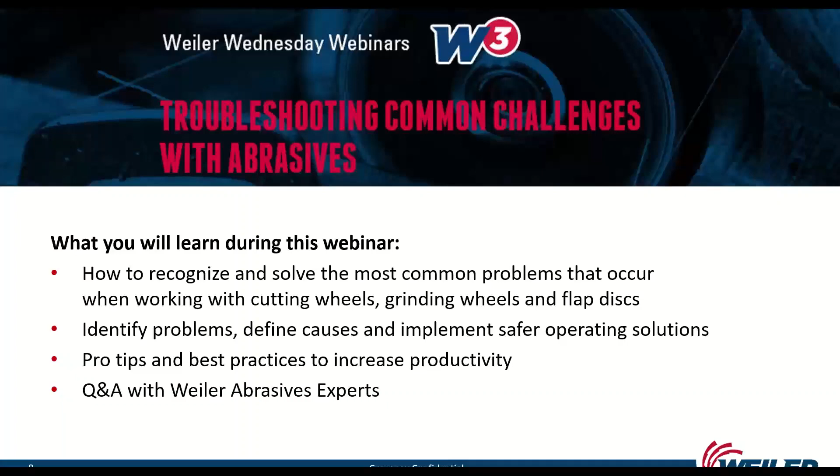My name is John Hines, District Sales Manager in the Mid-Atlantic region, and today I'll be troubleshooting common challenges with cutting wheels, grinding wheels, and flap discs. The information has been compiled from real experiences of district sales managers like myself, what we've seen in the field working with distributors, operators, safety directors, and owners. The problems identified are not exclusive to novice operators, but for all levels of experience. Consider this as an additional Weiler resource to help your company increase awareness of common problems when utilizing cutting wheel, grinding wheel, and flap disc. I'll also be sharing pro tips and best practices to increase productivity and cost savings.

Next slide. All right, so just like at A&M, at Weiler, we think about the business, we focus on the customer, and we help get it done safely. Weiler products are designed and manufactured to the strictest standards to ensure the highest level of quality and safety. Always be aware and follow proper safety practices.

Think about safety before you start your job and after you complete your work. Take the time to check your PPE for damage. Always inspect your tool and abrasive wheel disc for any signs of damage prior to use.

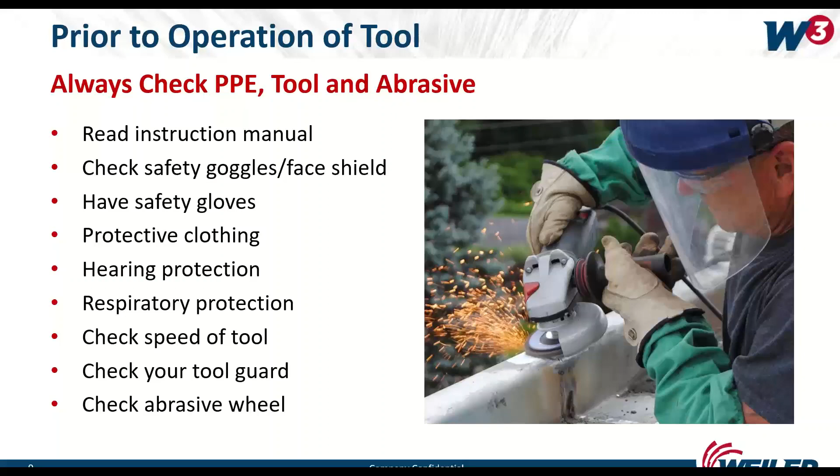And always keep in mind, A&M was able to supply a catalog of all the PPE and tools and abrasives that you need. Correct, Mark? That's correct, absolutely. So just talk to your local rep if you need a replacement or need anything new. Always important. All right, next slide.

Okay, best practice recommendation for cutting wheels. Utilizing a rocking motion through the cut versus a hard pushing force is a valuable best practice to implement when using cutting wheels. This will greatly improve productivity, giving you a better balance of aggression and life of your wheel.

So when I first used a cutting wheel on a handheld grinder, I was not aware of this technique. I started by pushing forward into the metal, just like I would with a circular saw cutting through wood. I had a heck of a time controlling that grinder, and I wore that wheel out so fast I barely made any cuts. Thankfully, after the suggestion was made to me - hey, relax your arms, don't tense up - and use your whole body to create a rocking motion moving through the cut.

You're not working with just your arms. My experience was far more positive. These simple changes improved my control of the tool, allowed me to make more cuts, and showed how efficient the wheel could be. Next slide.

So let's talk about some problems that occur involving cutting wheels. Excessive pressure or leaning on the grinder will generate tremendous friction and heat at the leading edge of the cutting wheel. This increased heat and friction will cause the wheel to break down faster. Some users feel leaning on the grinder will increase the cut rate or performance, however, that is not the case.

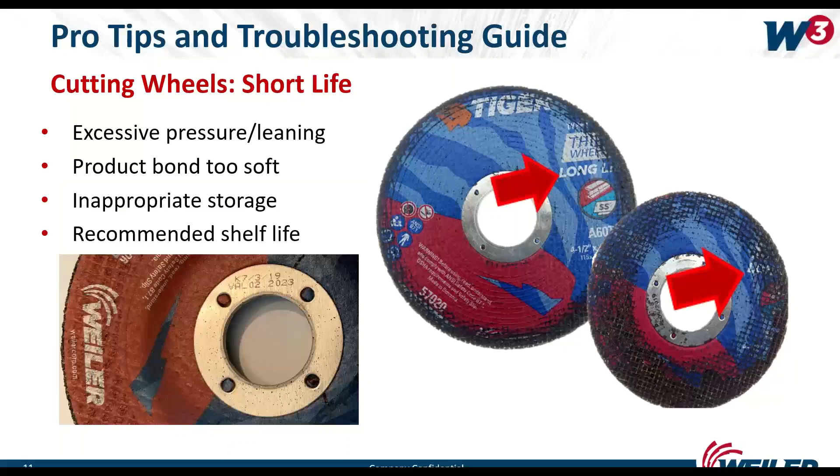Varying your orientation away from 90 degrees can create excessive side load stress on the metal flange. This stress can cause the wheel to break free and lead to injury. An important product note to be aware of: all Weiler cutting wheels do have metal flanges in the arbor hole. If a workpiece is not properly secured, it can create excessive vibration. This stress can cause fractures throughout the wheel, causing the flange to break free.

If your cutting wheel becomes pinched or bound between two pieces of metal, the grinder will continue spinning and it will rip the flange free from the rest of the wheel. I have personally seen this happen while testing other cutting wheels at a fab shop in Maryland. Fortunately, the guard was positioned properly between the wheel and the operator, so when it broke free of the flange, the wheel did not strike the operator, and no one was injured.

When using a 7/8 open arbor cutting wheel, make sure the front and back flanges properly fit your grinder to correctly mount your wheel. The back flange should rest on the grinder spindle and not move excessively. The top flange should securely hold your cutting wheel in place and not allow the wheel to spin freely. There should not be any free movement of the wheel once it is securely clamped in place.

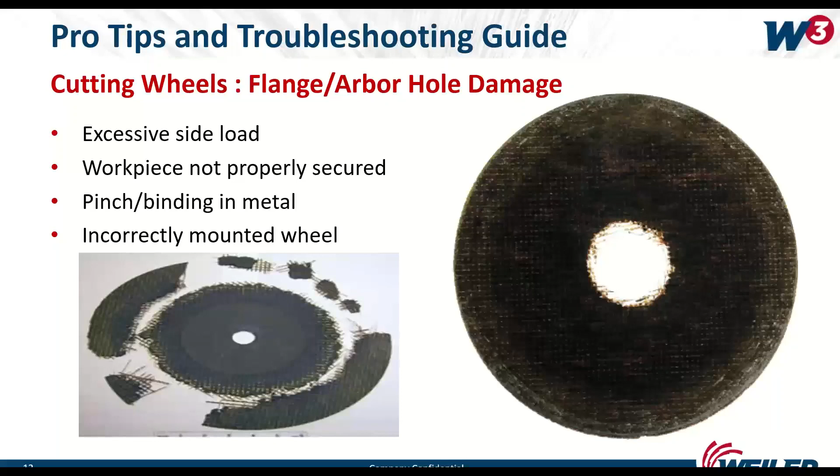A pro tip: after mounting the wheel, gently jog the tool by first holding the grinder away from your body and while not touching the workpiece, turn the power on to ensure that the wheel is properly secured. If you notice the wheel is spinning out of balance, check the wheel and check the tool spindle and make the appropriate changes.

Damaged edge: if you're not applying sufficient pressure, the wheel will not bite into the material, which will create excessive vibration or chatter. The vibrations can lead to frayed edges, as you can see in the picture to the right here.

As mentioned previously, these cutting wheels are designed to be used at an orientation of 90 degrees to the workpiece. It is important to remember they are not reinforced for stresses on the side of the wheel. If you are using a cutting wheel for grinding or deburring, you risk injury due to breakage by placing excessive side load stress and weakening the structure of the wheel. If you do need to cut and grind, I recommend looking at one of Weiler's 7/8 open arbor or metal hubbed combo wheels, which are designed for deburring and light grinding as well as cutting.

If a cutting wheel binds or stops during a cut, remove it before starting and re-entering a cut. Never try to restart a cutting wheel while it's inside the cut line or in contact with the workpiece. This is extremely dangerous.

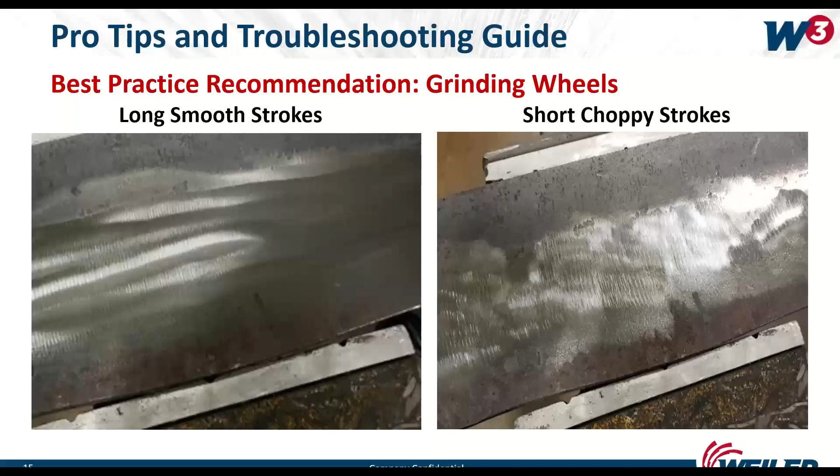Let's talk about problems that occur involving grinding wheels. A bent grinder spindle or damaged bearings in your tool can cause the wheel to spin out of balance, leading to uneven wear and possibly fractures in the wheel. A grinding wheel that has damage at the arbor will not mount properly on a grinder's flange and spindle. This damage can cause the wheel to spin out of balance. As you can see here in the pictures, the significant fractures in this wheel, and to the left you can see significant wear. So you're able to see very quickly when it's running out of balance.

Also, be sure the back flanges fit properly on the grinder spindle. Loose fitting back flanges will not allow you to properly tighten the wheel to the grinder for optimal safe use. Wheels with a 7/8 open arbor require both front and back flanges to be securely mounted on a grinder. Wheels with a 5/8 11 metal arbor do not require these flanges to be on the grinder. At Weiler, we make grinding wheels with both a 5/8 11 metal quick change arbor as well as a 7/8 open arbor. The metal quick change arbors allow for faster changeover times and can eliminate possible cross-threading experienced with non-metal threaded arbor products.

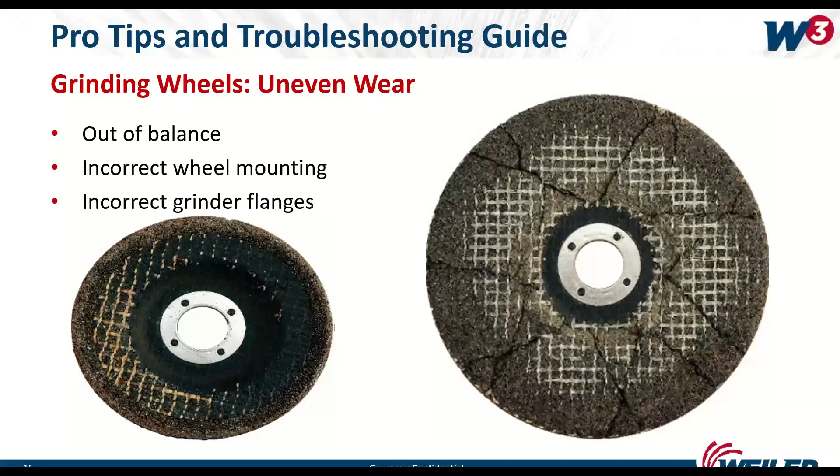Uneven edge wear: if you're pushing hard or using too much pressure, it is detrimental to the performance of both the tool and the grinding wheel. It will not make an abrasive work harder or faster. Rather, it will generate heat on the workpiece and dull the abrasive grains instead of exposing new sharp edges. If you feel the grinder getting too hot or hear the motor slowing down, you are leaning on the tool more than you should.

Now, grinding angle. A lower, flatter grinding angle will increase your wheel life, but at the expense of effective stock removal. If you are grinding on harder metals, the shallow angle will not be efficient to bite into the material. It will skate over the surface and your removal rate will significantly reduce, greatly decreasing your productivity.

If you need an aggressive grinding wheel for use at lower angles, you should consider the Type 28 wheel from Weiler, also known as a saucer disc or saucer grinding wheel. A steeper grinding angle, closer to 45 degrees, will allow for a more aggressive removal rate. However, keep in mind it will increase the chances of gouging material by digging in too deep as you are grinding.

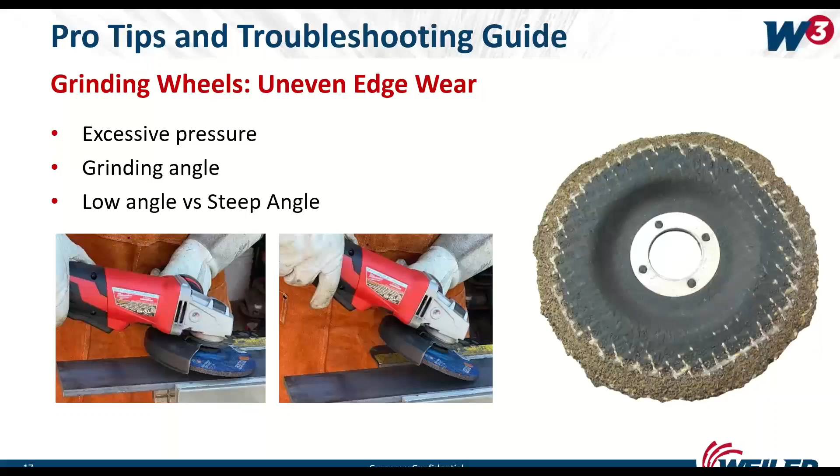Inappropriate wheel choice - this is something I see often in the field. End users trying to utilize what is available, what they have, not what is best suited for the application. Earlier this year, pre-COVID, I was at a fab shop in Norfolk talking to some operators starting a job requiring a lot of aluminum grinding. While talking to the owner's son, I noticed a considerably glazed, but not significantly worn, grinding wheel. I explained that the glaze is aluminum coating the wheel and dulling the grain, thus decreasing the removal rate of the wheel.

Now, grinding wheels have either aluminum oxide, zirconium, or ceramic grains embedded in a resin bonding material. As a grinding wheel is used, the grains fracture to expose new sharp edges to continue material removal. If there is inadequate pressure, or you're using an underpowered tool, the grain will dull instead of fracturing, resulting in the wheel becoming glazed or loaded. This glazing or loading effect will also reduce the removal rate of the tool, greatly decreasing your productivity.

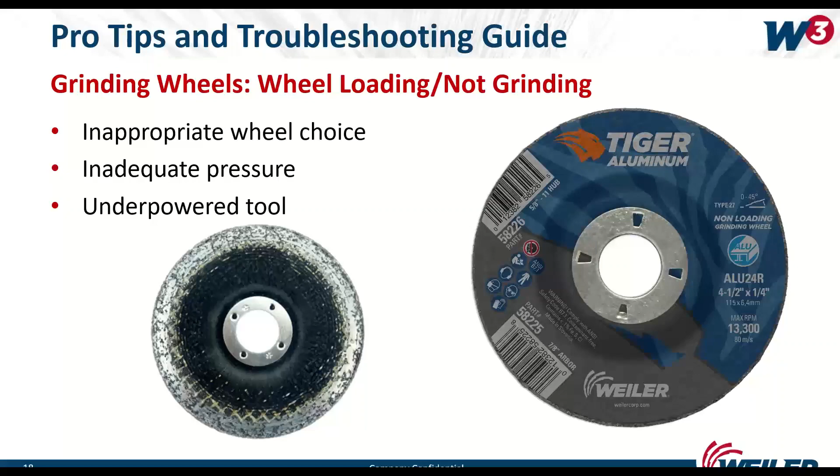Okay, best practice recommendations for flap discs. Again, proper grinding angle - it is important to implement this best practice when using flap discs. It will greatly improve your productivity, giving you a better balance of aggression and life. Weiler offers numerous styles of flap discs, as you will soon see. By having more options available, we can help provide the right solutions to improve your efficiency, reduce your costs, and improve your productivity as well.

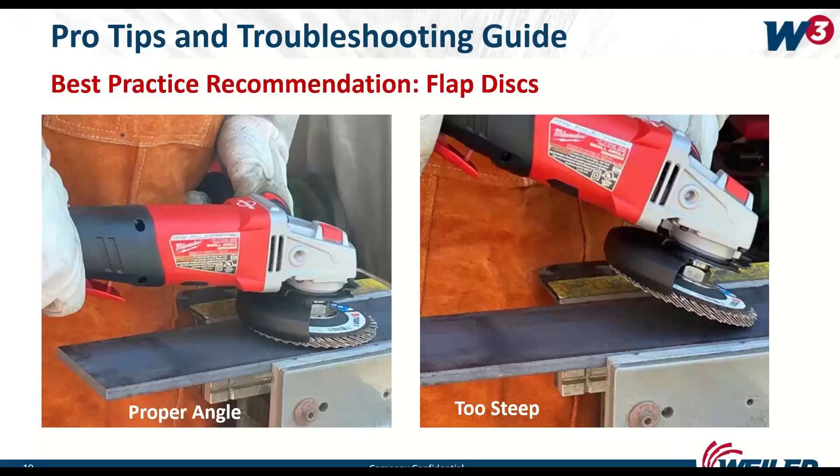So the first you'll see is the conical Type 29. It's the angled flap disc that provides the most surface contact at a higher grinding angle and higher pressure. This is a flap disc I see most often in the field, and I'm sure many on this call can immediately recognize this style. Next to that, we have the flat Type 27.

This will offer smoother grinding at lower angles and lighter pressure. This is more designed for blending and finishing on flat surfaces. The high density Type 27 is designed for very aggressive stock removal on irregular and uneven surfaces. It conforms easier than a standard Type 27 flap disc because it's not as compacted down, so it has more give to it, providing more comfort.

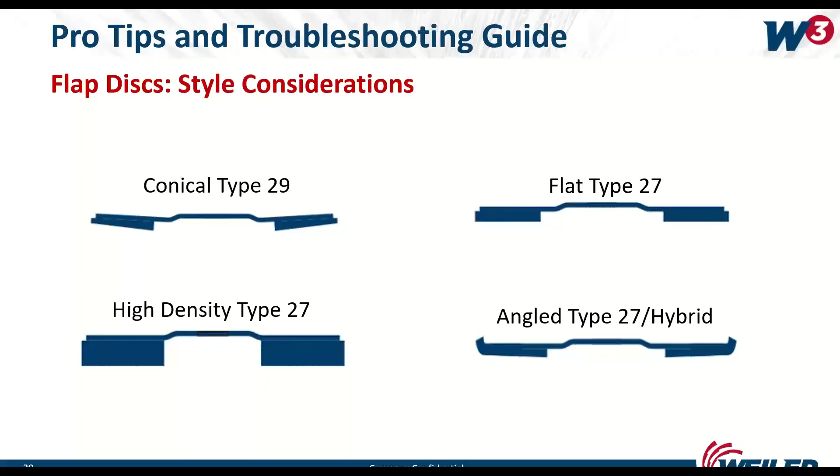So let's talk about the problems that occur with flap discs. If you reduce your grinding angle, too steep of an angle will cause premature wear on the outer edge of the flap disc. By using a shallow angle, you will have more grain in contact with the workpiece, increasing the efficiency of your disc and improving your productivity.

Please consider the style you are utilizing for the application. Sometimes simply switching from a flat Type 27 to a Type 29 will allow for more surface contact to the workpiece. Always remember, a longer lasting flap disc will help eliminate costly waste in the end.

So often price is at the forefront of purchasing decisions. Weiler flap discs increase efficiency, reduce operator fatigue, and reduce costly waste. Flap discs may have a higher upfront price point than a grinding wheel. However, in spite of this, when you consider cut rate, life, consistency, and reduced work damage, it's not hard to recognize a well-designed product that will increase your return on investment.

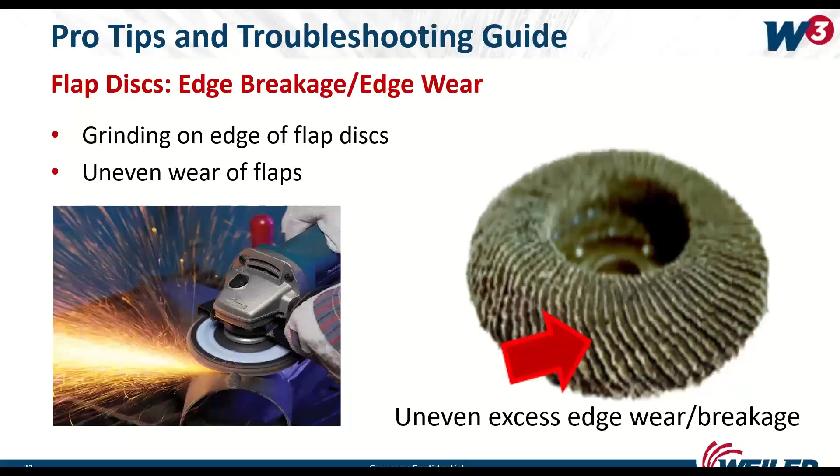Always make sure the discs you're using are appropriate for the workpiece material. This applies to flap discs as well as grinding and cutting wheels. If you're working on aluminum, make sure your wheel is designed for it. A wheel not designed for aluminum will load quickly and lose its ability to cut.

Sometimes you need to consider a coarser grain that is more aggressive. Flap discs have a broader range of grits than a grinding wheel, ranging from as low as 36 grit to as high as 120 grit. The higher grits have a more closely packed grain structure, and they're more susceptible to loading and typically used for finishing applications.

I was visiting a customer, pre-COVID, and they were trying to remove mill scale from metal tubes prior to welding. He was complaining of the costly, time-consuming rework and expensive, wasted abrasives. What he was doing was first using a specialized 36 grit ceramic resin fiber disc to remove the scale, then following it up with a 60 grit ceramic flap disc to remove the scratches the 36 grit disc was putting in.

The problem became apparent when I saw the glazed flaps on the discs he was using. The flaps of the ceramic disc were not properly wearing and exposing fresh cutting grains. So my solution was to take a step back and try a 40 grit Wolverine zirconium flap disc. The Wolverine disc was able to remove the mill scale effectively without glazing and provide an acceptable finish. I was able to take his product cost down from a combined $8 for 2 abrasives to just $3 for 1 disc.

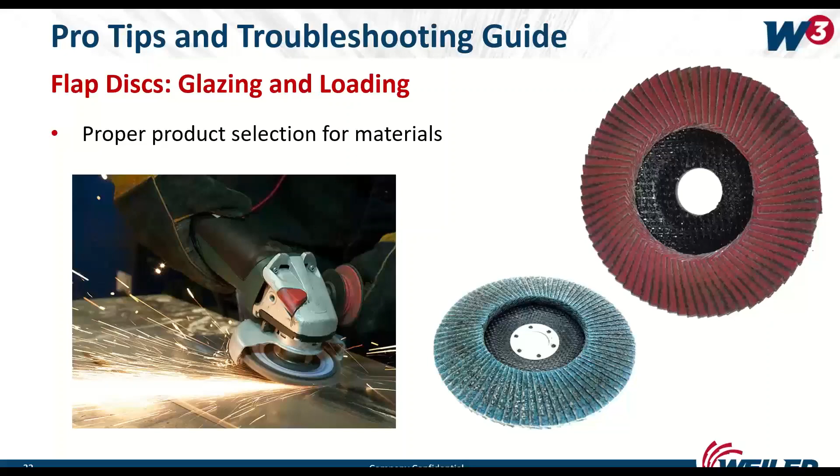Okay, to review. Pro tips for productivity. Always utilize proper body position and avoid pushing into the workpiece. Always gently jog the tool after securing your product to check mounting and balance. Be aware of your cutting wheel binding or pinching.

The ideal grinding angle is between 15 and 45 degrees for a Type 27 grinding wheel. You should consider Weiler's 5/8 metal hub grinding wheels for faster product change. And also, Tiger angled hybrid flap discs are a great option for tight, hard to reach areas over traditional flap discs.

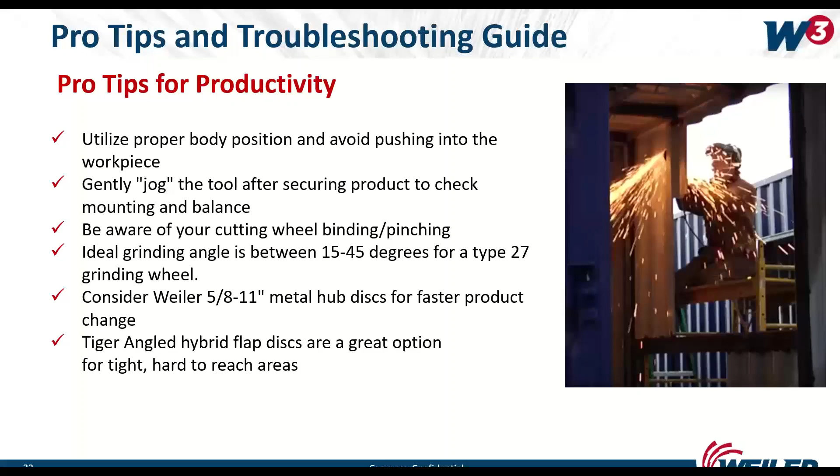Additional resources that Weiler offers: the troubleshooting guide, which this presentation was built off of, helped identify problems, define causes, and offer safe solutions when using cutting wheels, grinding wheels, and flap discs.

Also, we have smaller catalogs as well, called our metal fabrication catalogs, specifically focused on metal fabrication with the following products: cutting wheels, grinding wheels, flap discs, resin fiber discs, and wire brushes as well.

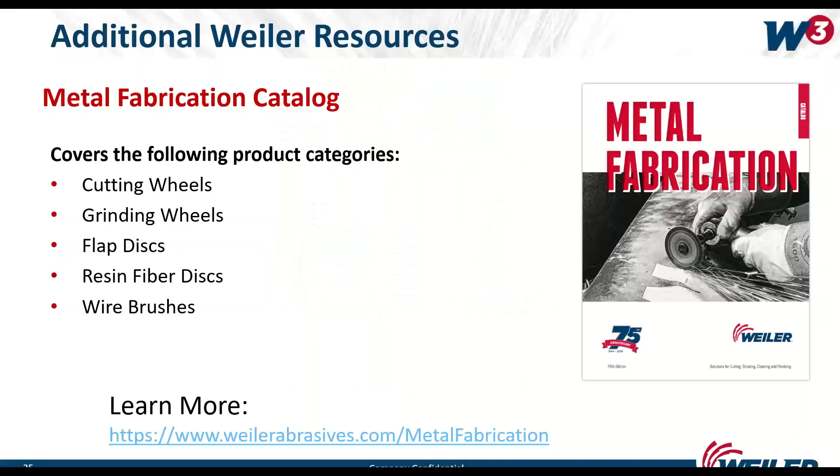With regard to harder bond, what is the rule of thumb to understand what is an appropriate adjustment in the bond? Should you take into account diameter as well?

Not necessarily diameter, so to speak. When you're considering a harder bond, usually you want to also look at the power of your tool. If you're using a lower amperage tool, it's not going to have enough power to break down a harder bond, so look at your tool as well. Also look at the material that you're cutting. If you're cutting a harder metal, you don't want to go with a harder bond, you want to go towards a softer bond, or like an Inconel type product. The material that you're working with is going to be a consideration. Diameter is really not going to come into play as far as a bond, it's more so your tool.

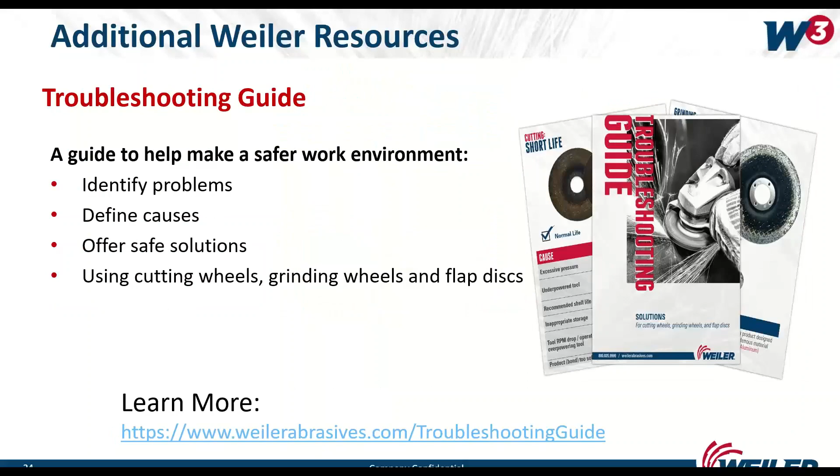And excessive pressure, if you've ever cut with a circular saw, cut wood with a circular saw, typically you push forward into the material with a cutting wheel. So the same thing there, you don't want to. If you would go back, Mark, go all the way back to the first slide for cutting.

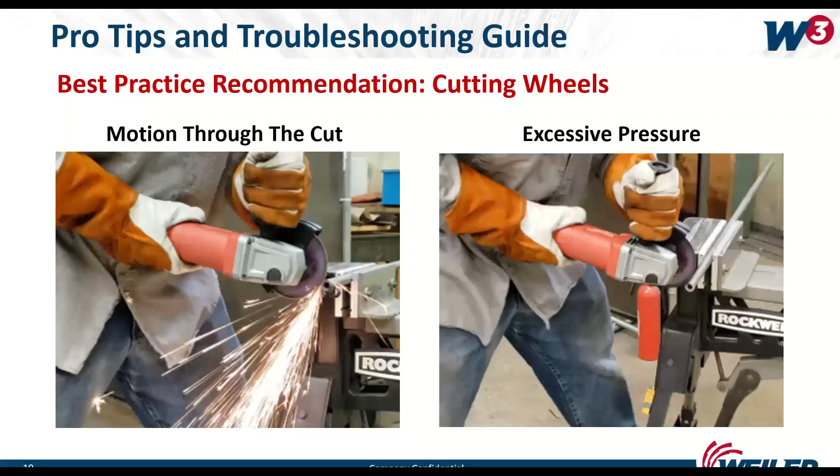Right there. Yeah, so if you look through here, the first picture shows motion through the cut versus excessive forward pressure. If you just kind of stay in one place and push forward, like I see a lot of guys do, that's creating a lot of excessive pressure on the front edge of the cutting wheel. It creates a lot of heat and friction, and that reduces the life of the cutting wheel. If you're working with the grinding wheel, same thing. If you have a wheel that's not cutting, a lot of people's tendency is to bear down harder onto the grinding wheel. You'll be able to feel that in the grinder, you'll feel it actually heating up, and that's how you'll know you're putting too much pressure. So you want to have a fluid motion, you don't want to stay in one spot, so to speak.